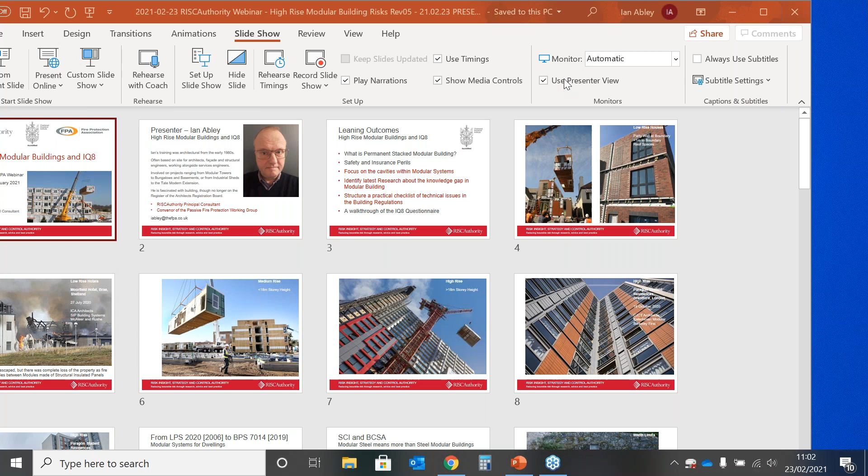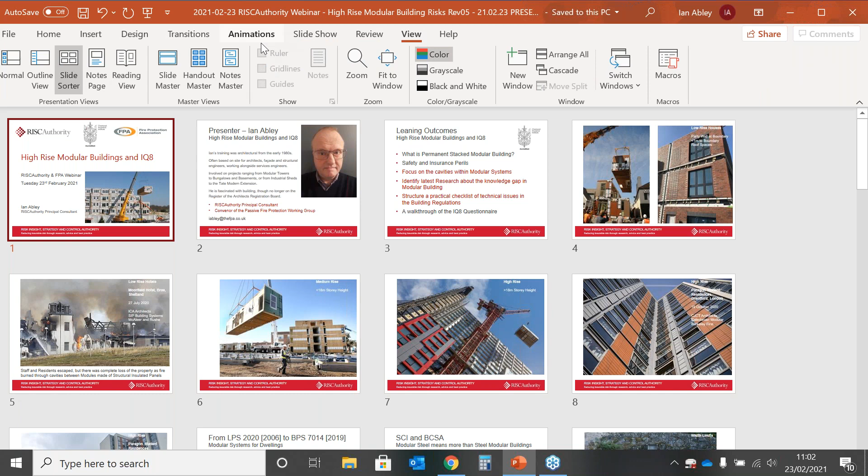Let's hope that's... we can see your desktop. Desktop, so I need to change that to... presenter. No. Right, I'm going to change the... yep. Sorry about this. I should have done it the other way around. I'm very sorry. Is that better now? Yes, that's it. Oh, you might need to change. We can see two slides. Yeah, I'm sorry, it's okay. Yeah, for some reason it's on my second screen. Sorry about this. I can't see how to change the screen. I've got two screens and I can't see where to change the screens.

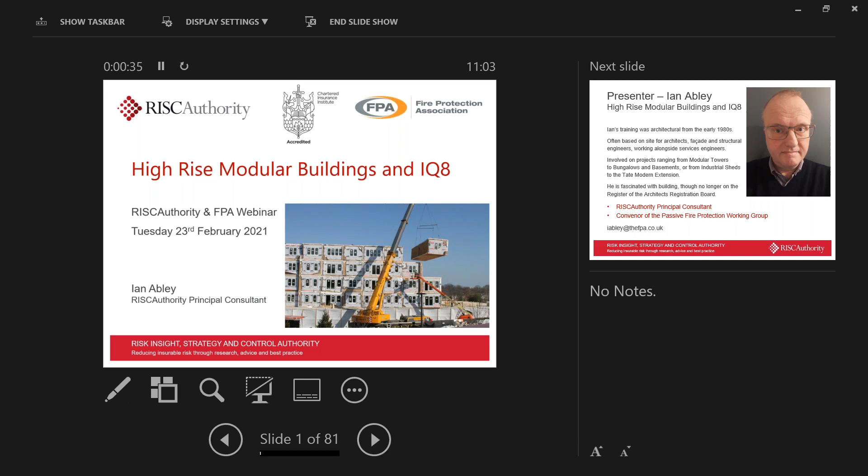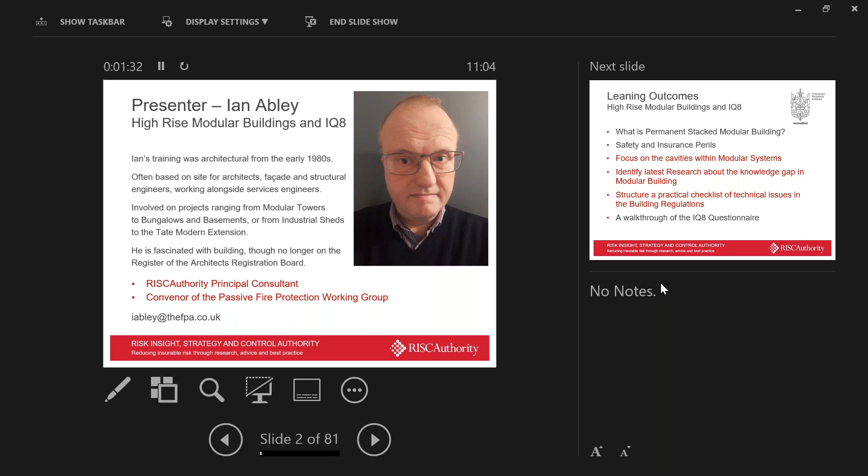No problem. If you go into the task window for GoToWebinar and it has show screen, you have the drop down, you'll be able to select whether it's screen 1 or screen 2. Sharing. No, I'm sorry, it's okay. I can't see which icon this is, Courtney. Where does it say share screen? In the sharing, do you have a sharing drop-down screen? Sharing drop-down menu in the little GoToWebinar drop-down box? Yeah, I'm in the drop-down box, I think. Yeah, there should be a sharing drop-down, and then that's where it has show screen, and then there should be a mini drop-down showing which screen you're actually showing. Oh, beg your pardon. Main monitor, is that the one? That's still showing as the 2. Is that the one? Yeah, that's the one. There you go. Is that the main screen? Yes, it is. Yeah, beg your pardon. I'm terribly sorry everybody, that's my incompetence.

Thank you. Good morning. The presentation today is on high-rise modular buildings and IQ8. The purpose of today is to look at permanent stacked modular buildings, to consider some of the safety and insurance perils. The learning outcomes were listed in the invitation.

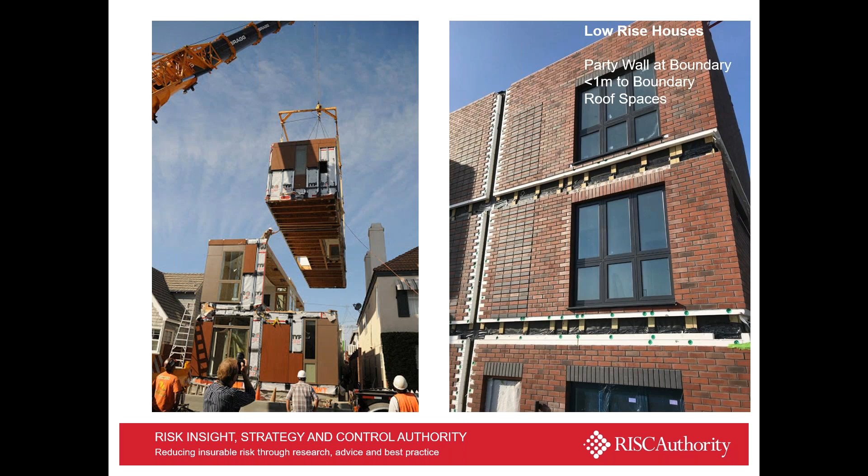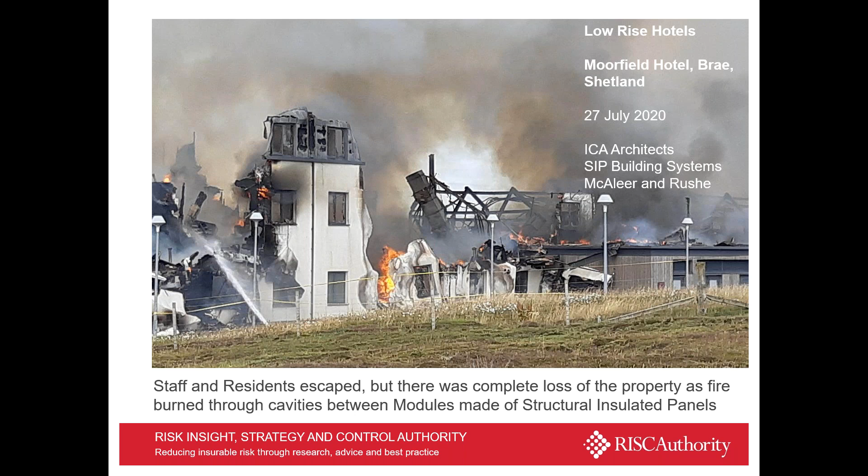I guess the best place to start is to think about what is meant by modular, because we're not talking about low-rise houses in particular, though obviously that's where modular starts at the smaller scale. Some of the lessons learned at the boundary for low-rise housing are pertinent to high-rise, as we'll see. We're keeping in mind that some low-rise modular has suffered complete asset loss recently, including particularly the Moorfield Hotel in Brae in Shetland. Everybody escaped—being low-rise, it was easy—but the hotel completely burnt through.

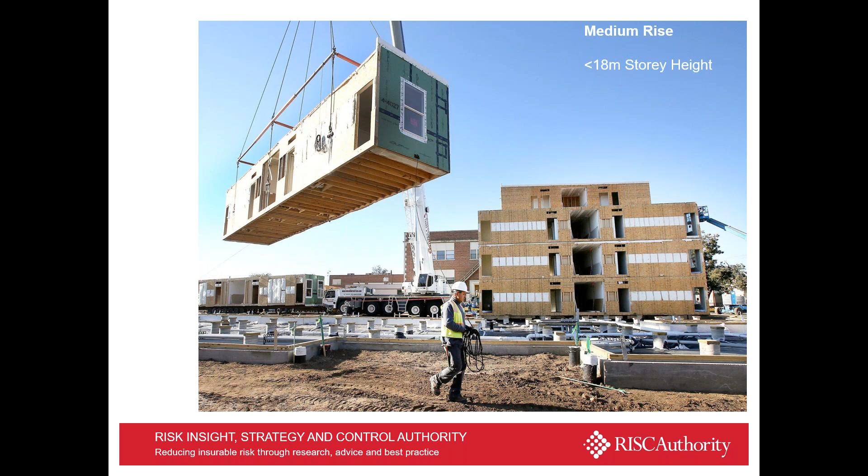We're not talking about medium rise. Let's, for the sake of argument, call that under 18 meter story height. We are going to concentrate on high rise and the increasing push of modular to greater heights, mostly in residential but not necessarily exclusively, although modular is particularly suited for residential because of the room sizes.

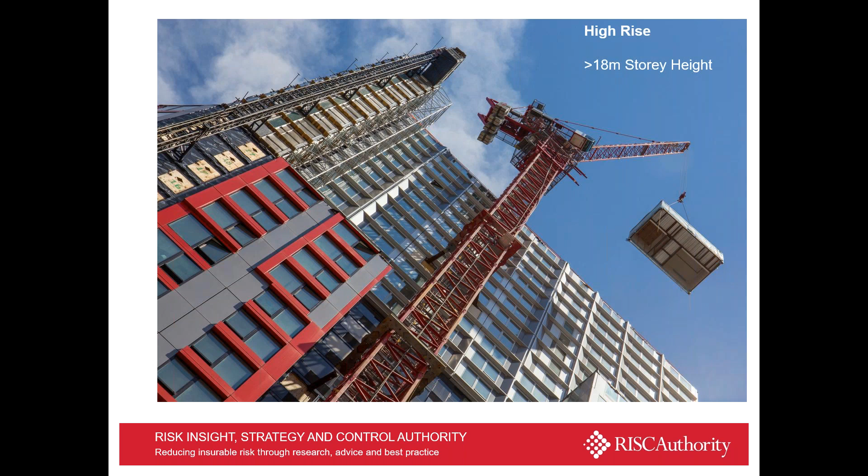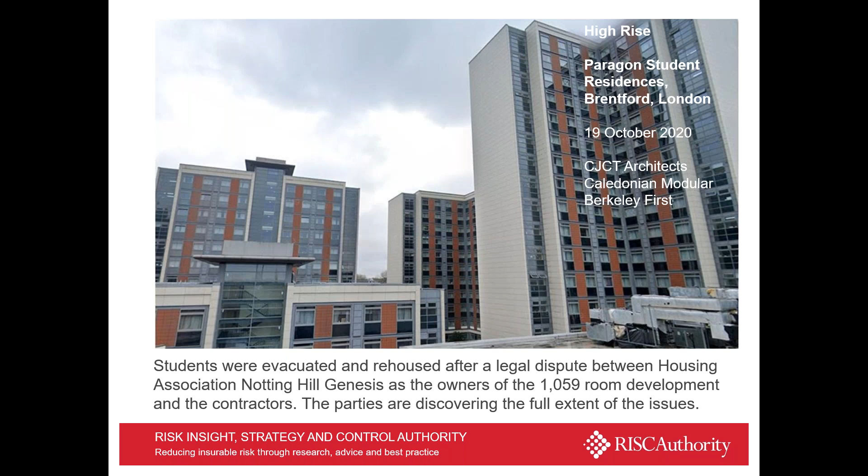We're also bearing in mind the recent incident of the Paragon student residences in Brentford, which had to be evacuated after several years of argument over the fire safety issues in that development. That's an ongoing matter and is not necessarily public knowledge, the precise nature of that dispute. But it's a bit worrying that a development of 1,000 modules isn't habitable, and you kind of wonder how, given the long run of modular thinking, that can be. I think that's the question I've got really.

The BRE has been pivotal from Loss Prevention Standard 2020, which was actually from 2006 - 2020 is just its numerical number - through to more recent attempts post-Grenfell in 2018 and 2019 to develop a BPS 7014 standard for modular systems for dwellings in particular, rather than the broader sweep of innovative systems, elements and components of residential buildings that was LPS 2020.

There's a focus on the stacked-up box, and that focus has been the subject of numerous studies. The early one that comes to mind was the Architect's Guide. When I was an architect - I'm not an architect anymore - the Architect's Guide was interesting reading in 1999, and Peabody pioneered their development.

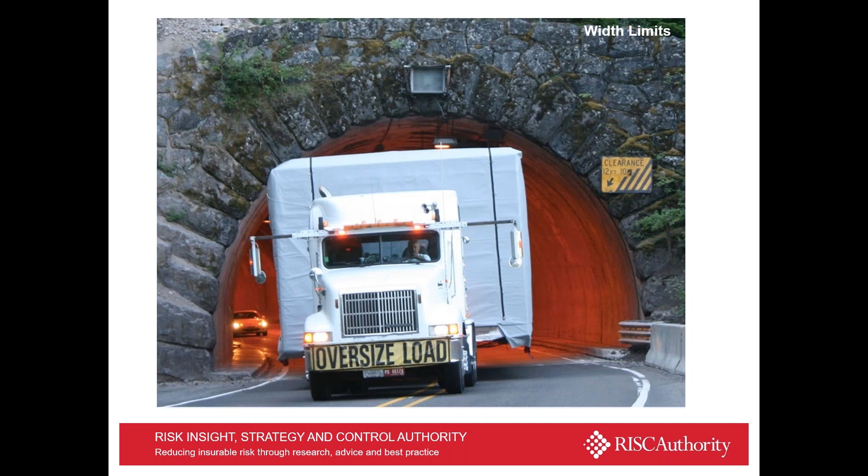Pioneered from the Steel Construction Institute's point of view was what was called light steel framing, though the weight is not light. A lot of the concern at the time was how do you deliver that kind of modular.

Much thinking in the last 20 years has gone into what is probably the best publication in latter years. It was first published in 2014, but then in paperback two years ago - by Mark Lawson from the SCI, Ray Ogden, who used to be funded by the SCI and unfortunately died very young, and Chris Goodier, who is at Loughborough University.

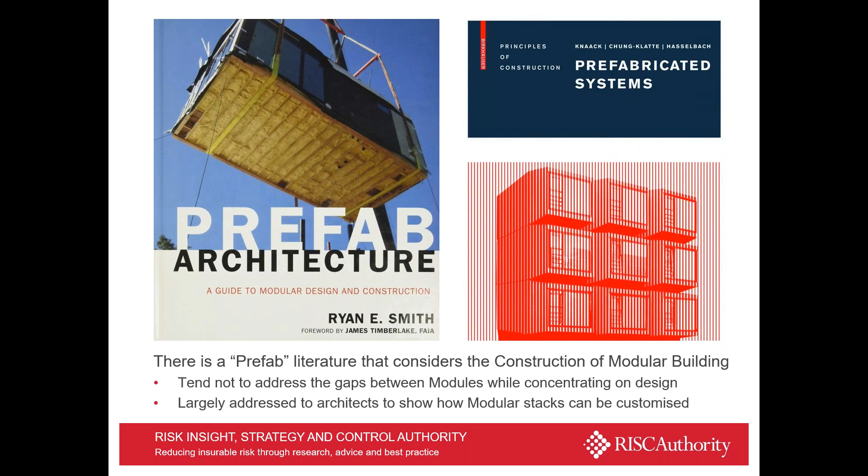This is a good read - worth getting if you want to know about modular. It concentrates on what architects want to know, on the box itself. Most of the guidance is directed at architects, and there's good literature that architects have taken on board themselves and turned into promotions - either collections of architectural schemes or marketing materials for their own practice expertise.

The SCI still publishes very good information freely on its Steel Construction Info website. But it's starting to seem a little naive, I think, given the recent issues with Moorfields and Paragon - it hasn't really got to grips with the practicalities of stacking boxes.

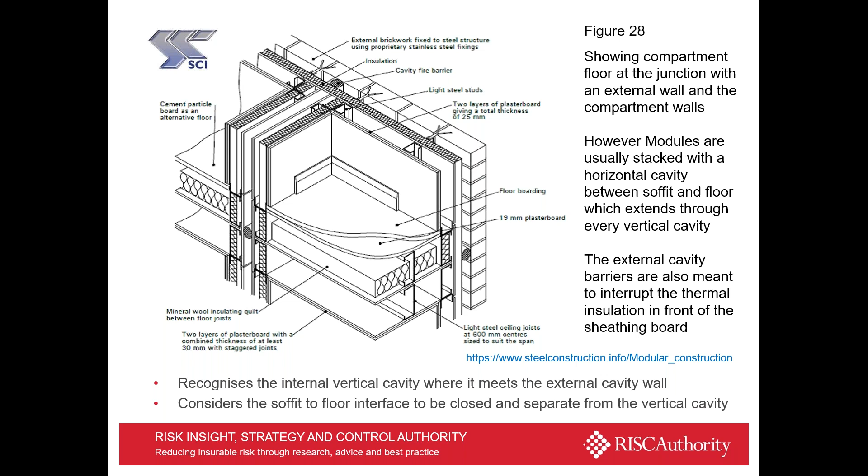In particular, the creation of cavities between the boxes. This diagram doesn't show the horizontal cavity between boxes, between the module units. It does recognize the vertical cavities, and also introduces cavity fire barriers, strangely at the facade - and that detail is just wrong. But at least it's recognizing there are issues between the modules, not just within the modules.

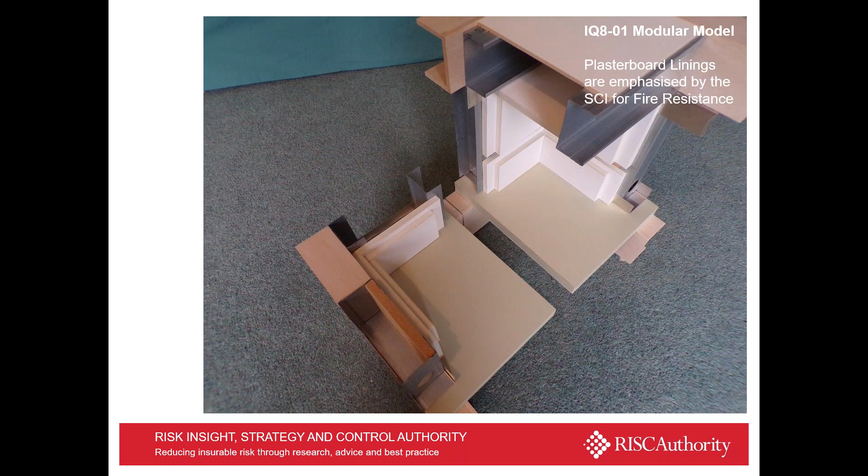So the emphasis within the modules is utterly on plasterboard for a light steel frame approach, because the plasterboard linings are doing a lot of work, as the Steel Construction Institute recognizes. The plasterboard is what people see as well, so people are concerned with the quality of the plasterboarding and the internal quality of fit-out.

Also, as you can see on the right-hand side, the way modules join and have to be masked and finished at their joins - so internal qualities are of great importance. And because the modules are coming together on site, they have to be joined on the outside, and that's got to keep the weather out. So the way that the facade is finished is of critical importance.

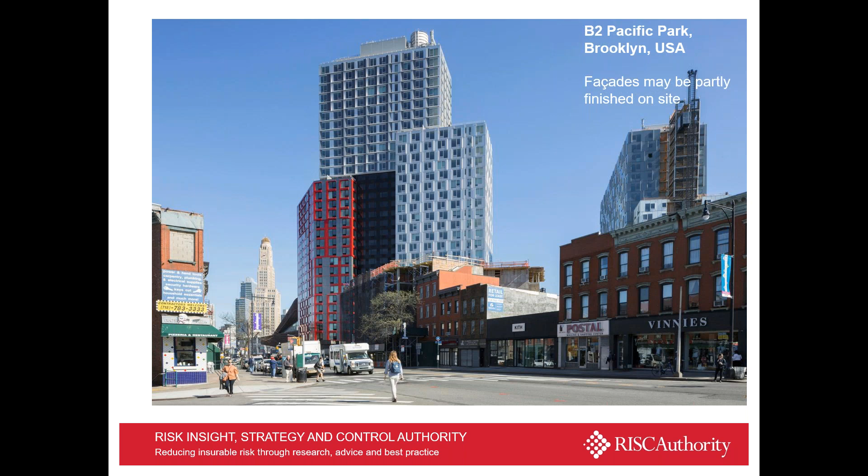This proved to be quite difficult at the Pacific Park projects in Brooklyn with Skanska, which ended up with a very significant contractual dispute.

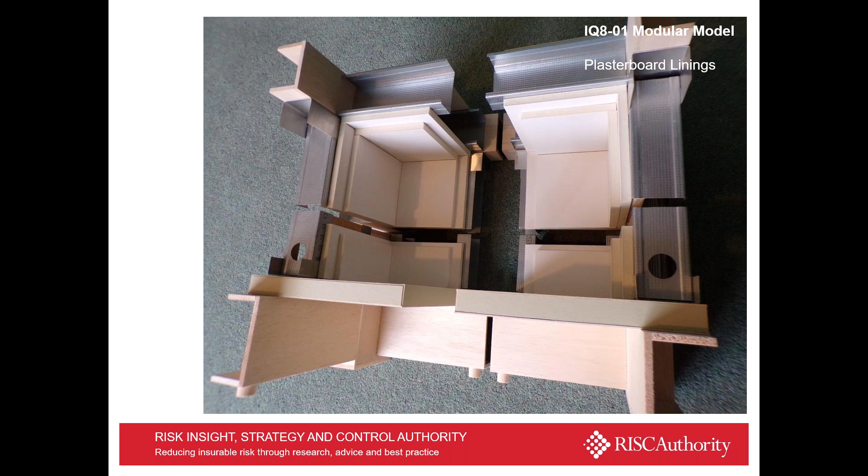So the inside of the box, the inside of the module - the plasterboard linings are doing a lot of work. They're also doing all of the finishing, but the nature of the plasterboard needs to be thought about.

I think one of the most significant pieces of work that recognizes this, again by Mark Lawson and Ray Ogden, this time with Rory Bergin, who's a partner at HTA Architects - within this paper, which is available for a small fee, it's been downloaded, when I've looked at it, about 7,500 times. So it's a significant paper that's often cited in much of the literature.

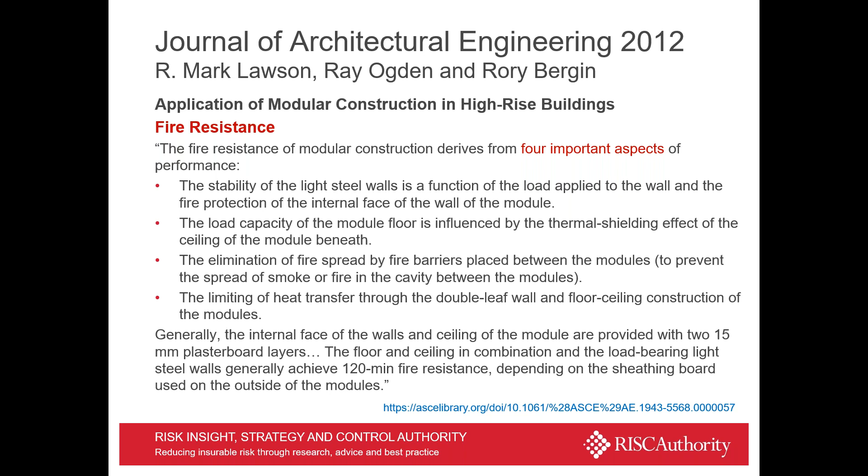There are four bullet points which make you really think about what's going on with a stacked modular building, particularly of a high-rise nature. And if you break those down, we produced a simple model.

It's quite hard to visualize these things in three dimensions sometimes. The box is easy to conceptualize - it seems like you're just stacking up containers - but it's the junctions between the boxes and the nature in which the stacking occurs, which is often proprietary. Every manufacturer's got their own particular take on a system. Some are very similar, but some are extremely novel and almost patentable connections. Certainly the kind of system information that modular manufacturers compete in the market over to make their own service and products better.

These junctions become very important, and the paper, the 2012 paper, the first bullet point recognizes that the stability of the module relates to the infill as much as the hot rolled steel. So the balsa wood part is obviously the hot rolled steel columns.

The infill is often a very light gauge steel section. Here I've used dry lining sections, but sometimes they're larger gauge, 2 or even 3 millimeter cold rolled steel, but they're treated as an infill.

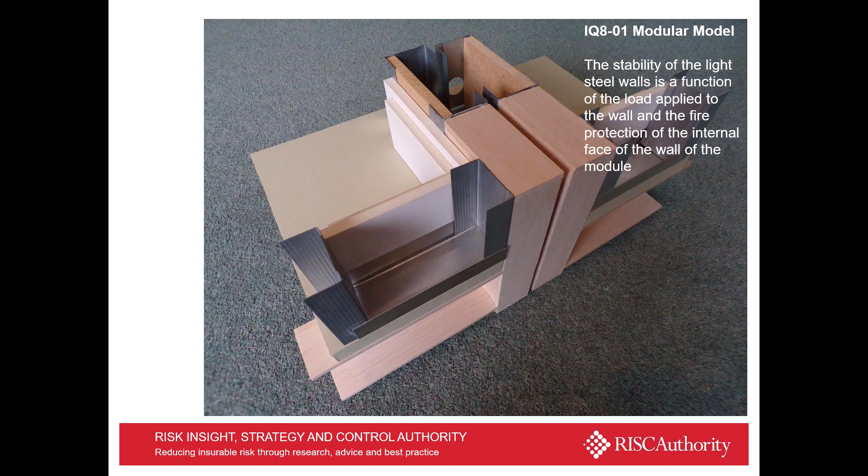The second bullet point is that in fire, the floor, which is shown here as the soffit of the top of the module, the floor above is influenced by the fire resistance of the soffit in the module. Well worth thinking about, because the ceiling inside a module may be a non-fire resisting ceiling below this soffit, so it's the actual soffit at the top of the module that matters.

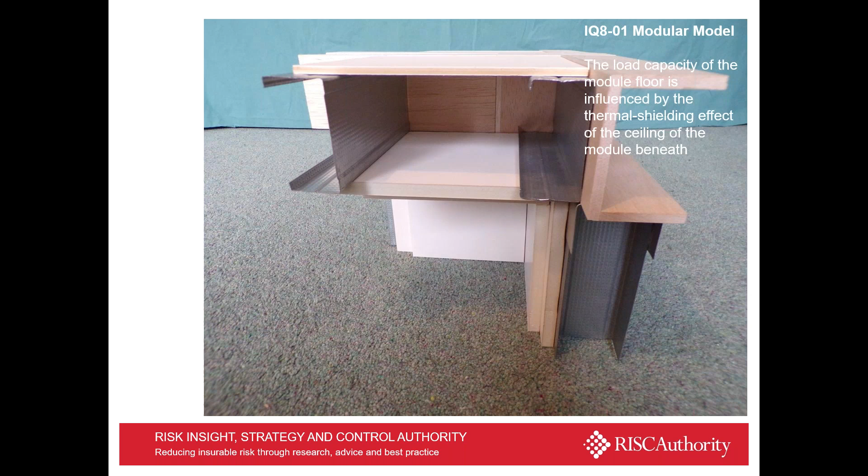As you can see here, where you stack up the next module, the paper is rightly concerned to point out that you're forming cavities. The SCI don't show that on their diagram online, but you create horizontal cavities as well as vertical cavities between modules.

Sometimes the channels at their perimeter flange out, sometimes it's flange in, but the same problem remains: you've got a cavity that continues from one floor to another, and a cavity within the compartment floor running horizontally, joining all of those, which extend to the external facade and back to the core. So as the paper says, they need to be considered for fire.

Then there's a very clear statement as the fourth bullet point of that paper about the way heat, so the insulation of the construction, prevents excessive heat getting to the hot rolled steel structure, which over 550 degrees will start to lose its strength.

Now in primary steel frames, the primary steel is often protected by rock wool or another insulation form, a stone wool fire protection, to prevent heat getting to the steel and melting it, or making it lose its structural strength over 550 degrees.

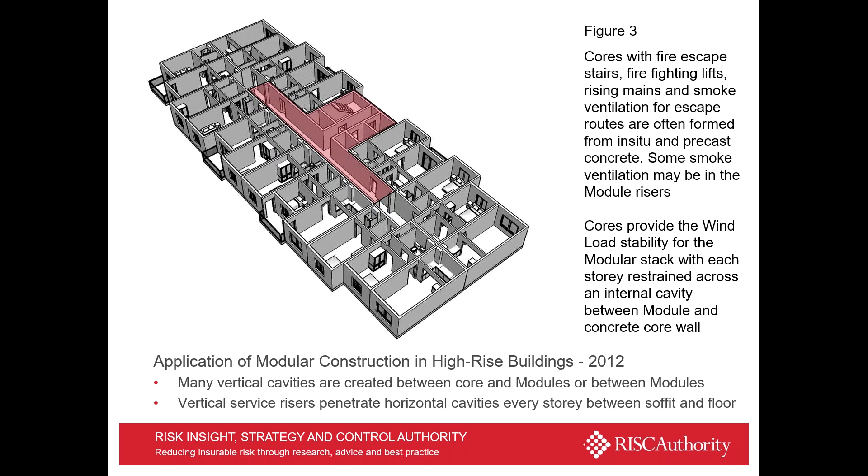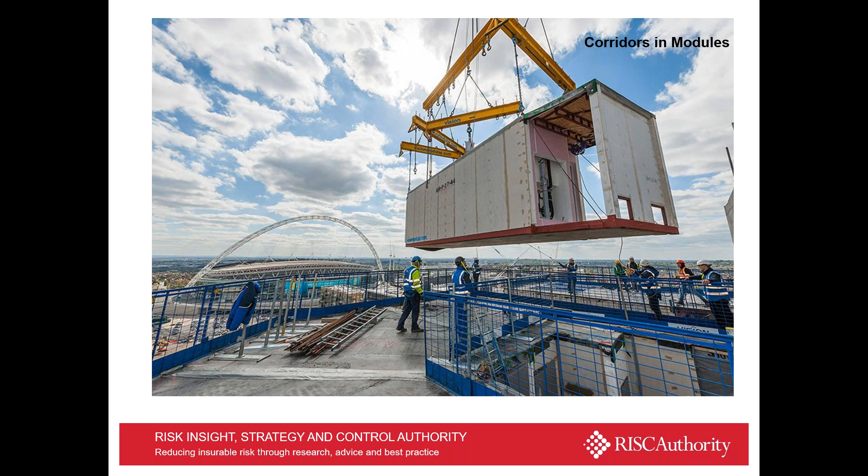Most of the time, you don't have the corridor formed in the core, you have the corridor formed in the module itself, often with service risers running vertically through that space. So within that one module, you've got a room compartment, the segment of a corridor compartment, and a vertical service riser, all interpenetrating, all needing to be thought about as they go through the horizontal and vertical cavities.

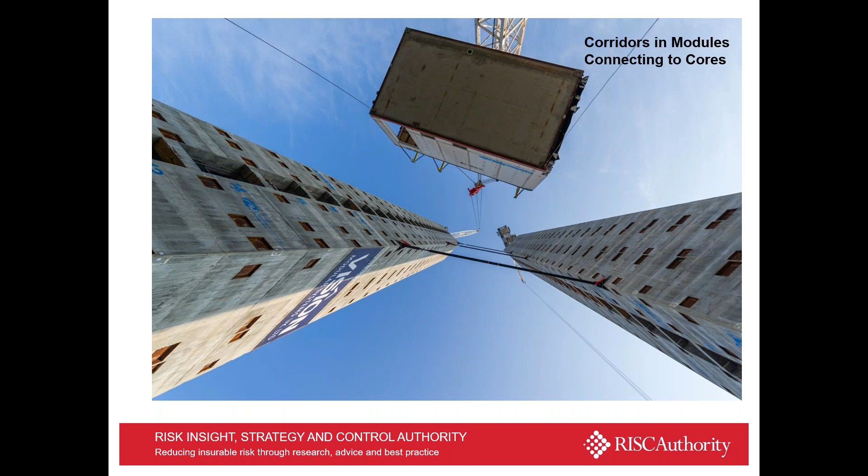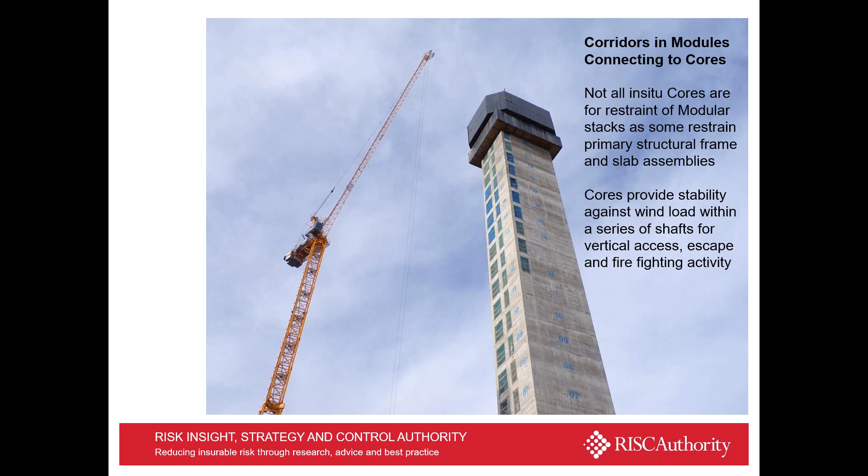And those are assembled around what are often slip-formed cores. In this case, the cores are braced, as you can see, as the modules are erected, because you don't want them moving differentially as the modules are installed. Sometimes you see developments with slip-form cores that are nothing to do with modular at all, and it's just another technique for wind bracing a primary steel frame.

Those structural standards for the core are Eurocodes. In fact, there are a number of standards that apply to modular, and this study, led by Chris Goodier, one of the authors of the design guide for the BSI, was a listing of all the relevant standards that exist for other forms of construction that can be applied to modular.

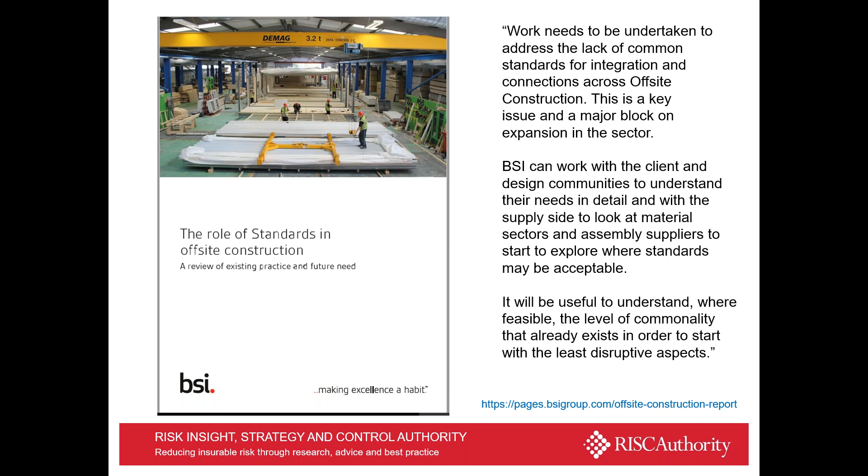It's not just a matter of buying somebody's system. There are standards that stand behind those systems, and that's a very useful guide to those supporting standards that manufacturers would recognize and have to work to.

Similarly, there's work in progress in Canada, looking at the absence of information for high-rise modular construction, trying to pull forward existing standards that can be applied to a sector that's innovating faster than standards are written. Arup have produced the first document in this new study. It's one to watch, I think. The Canadians have long had CSA A277, going back to the 1970s, for prefabricated buildings, but now we're talking about modular towers.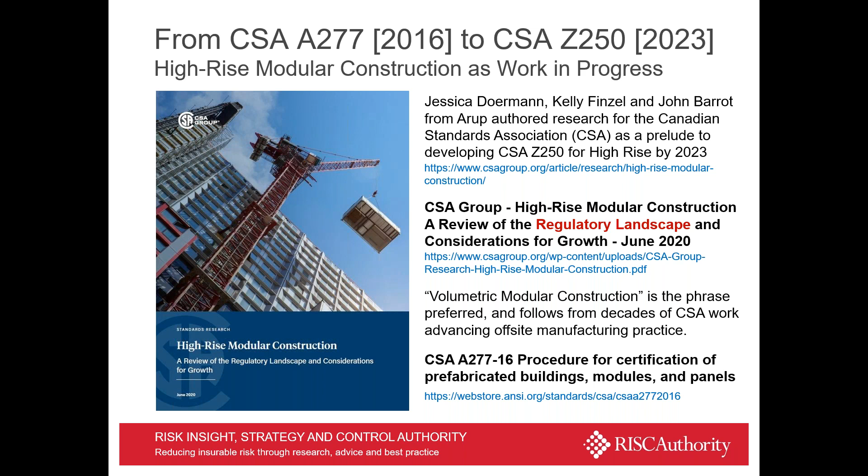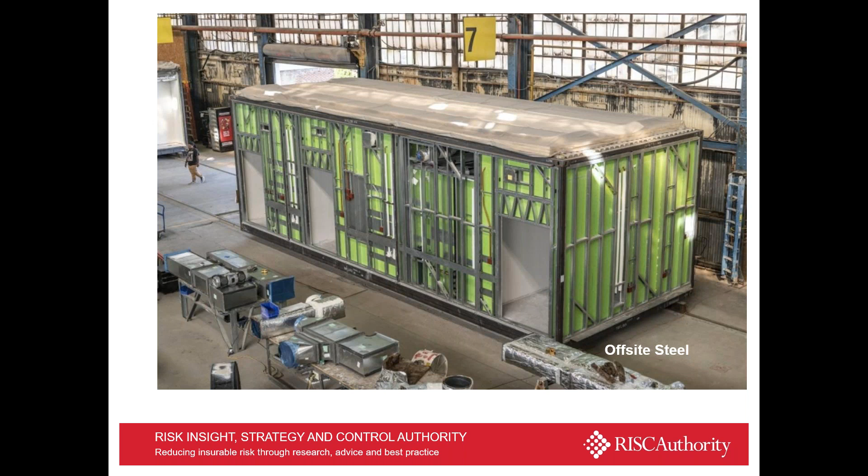They're proposing a standard specifically for the sector, which doesn't exist in Britain, but the Canadian effort is definitely something to follow. They're system agnostic - looking at timber, hot rolled steel frames with light gauge steel infill, and also concrete. Concrete's interesting because it's usually assumed light gauge steel is a lot lighter than concrete, but advances in the concrete sector show weight is not necessarily just the gift of the steel producers. Equally, timber can be extremely heavy as a unit.

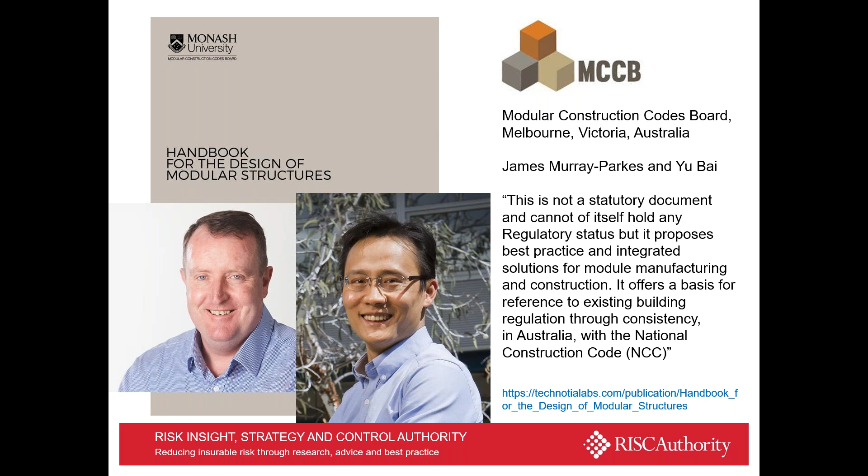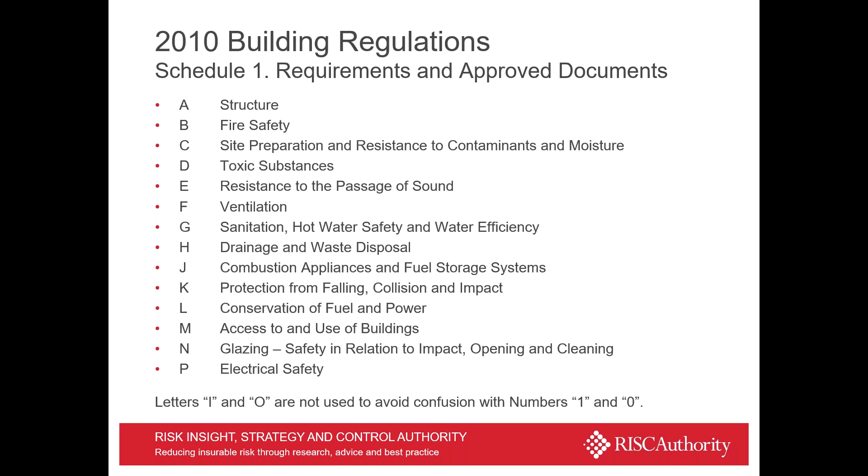And of course, probably the most obvious thing I wanted to say today was, don't invent a new list. In Britain, there is a list. It's the legal requirement - Schedule 1 of the 2010 building regulations - and it makes most sense to follow because it is the legal requirement for any building, including a modular tower. Don't reinvent the wheel - let's explore what modular means in the context of the 2010 building regulations as they amend and as they are being amended.

Now, the approved documents are extended beyond that Schedule 1 list, which is worth bearing in mind. And of course, most famously, most notoriously, Regulation 7 was extended to specifically look at the external cavity wall for fire post-Grenfell, as a response to Grenfell. For high rise, it was explicitly high rise as relevant buildings, Regulation 7.4.

It's easy to get to a point where you forget that Regulation 7.1, the old Regulation 7 on its own, applies to the whole of the building, not just the external facade. The facade is often produced by somebody else, not the modular manufacturer. They have a split responsibility in a contract, which is something we've tried to draw out of the IQ8 questionnaire - who is actually responsible for the difference between the module and the core, and the module and the external facade, because these processes are not just different manufacturers, different contractors, they're also different designers often.

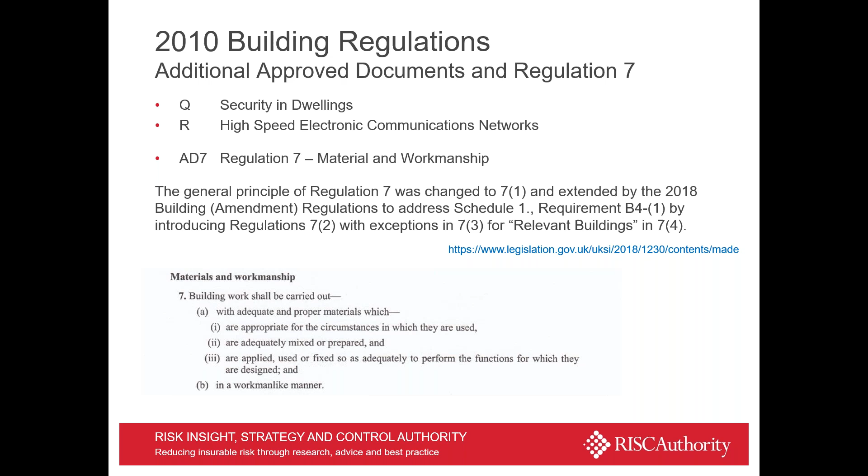It's useful to also remember that the 2010 building regulations are not just looking at life safety. There are sections of the requirements that get transferred into the approved documents - England, Scotland, Wales and Northern Ireland have slightly different technical guidance and technical notes, which are the subject of another report - that's actually the subject of IQ7, which is downloadable now. But the difference in the different sections of the English approved documents and the requirements...

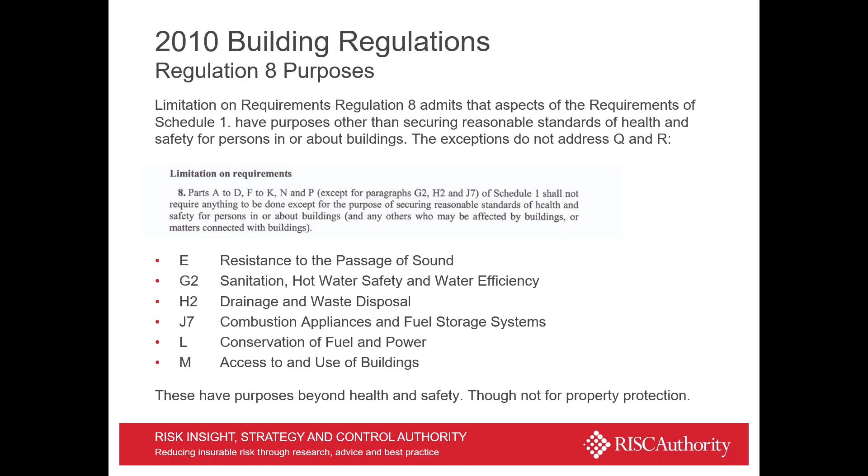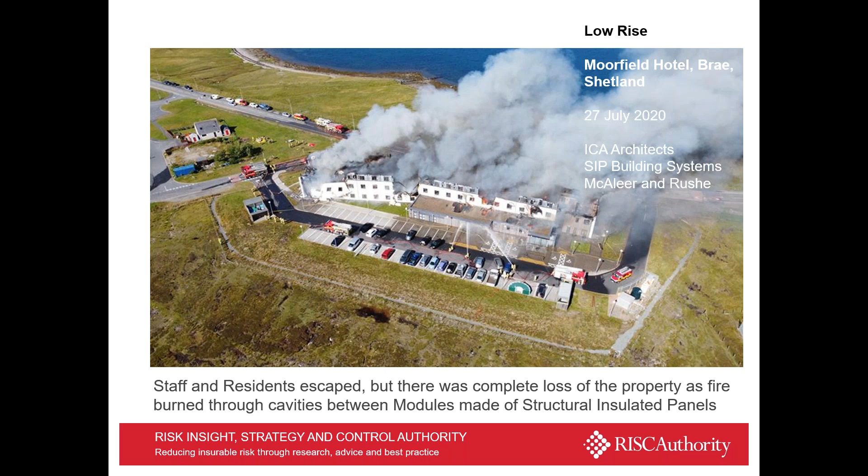...they're not limited to life safety. So loss of the asset isn't part of property protection, isn't part of the approved documents or the requirements, but there is a precedent for other things other than life safety being considered. I think if the Moorfield Hotel in Brae shows us anything, it's that loss of asset is one thing for a 2-story hotel to burn to the ground, quite another for a tower to be a complete write-off. And that fire in Brae was unstoppable - it couldn't be put out.

The Brae construction was a SIPS panel - timber and polyurethane core in the structural insulated panel. But there are many forms of construction capable of being turned into a high-rise structure, and that's a neat - there's a push for timber at high-rise. Light gauge steel has been trying to open the market increasingly and succeeding in several towers in Britain already. But there's no reason why you couldn't build a modular structure to high rise using a concrete core or a braced core of some kind, and stacking the modules around.

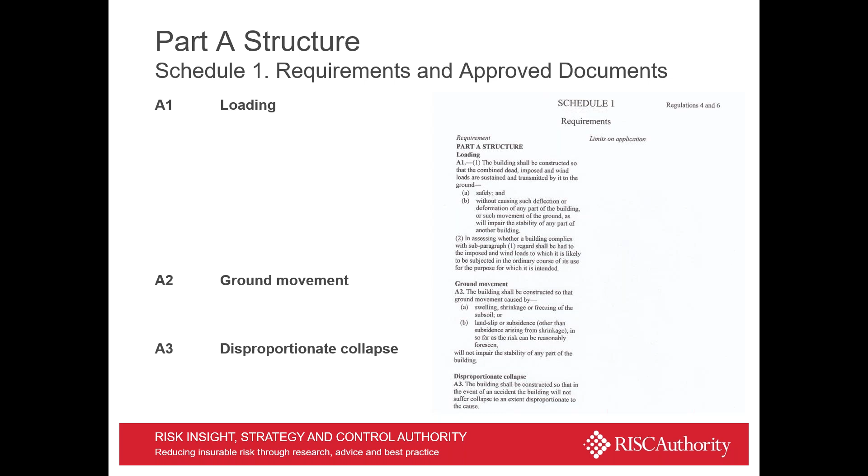In doing so, you really have to interrogate what the requirements of the 2010 building regulations are asking you to do, and that's how we've tried to structure the questionnaire. The IQ8 questionnaire has a front end with higher level questions, and appended to that are a number of more focused questions.

These take the structure of the 2010 requirements, Schedule 1, and drill down into a series of increasingly focused issues to consider. The obvious one for structure is how the modules support the dead load, how the columns increase at the bottom and reduce in sectional thickness at the top, how they're connected, and how they avoid using shims, maintaining levels as you create the cavities going up through the building.

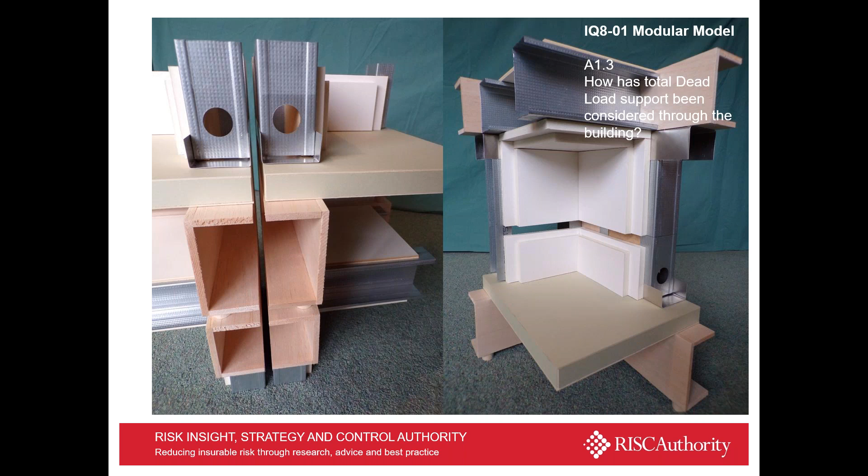So the connections of modules becomes important, and it's one thing to support the building. It's also a factor for the modular manufacturers to be concerned with the way modules are lifted onto the building and transported - their own handling, the way the boxes are framed to take crane handling.

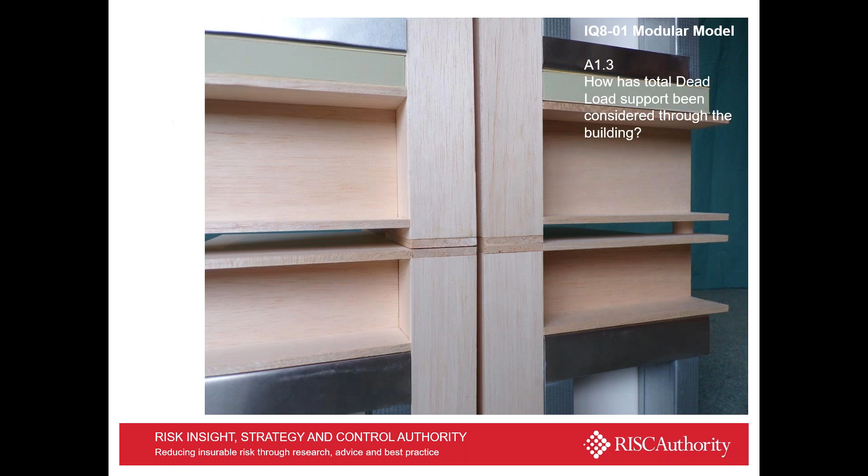Most structural engineers will be able to use existing Eurocodes to work through Section A. But if the structural engineer works through Section A without reference to Section B, requirements for fire safety, they may spend time developing a design that hasn't considered what a fire engineer for a high-rise building needs to consider. Structural engineers are adept at looking at steel in fire, and while disproportionate collapse is an accident rather than a fire condition, the ability to look at fire conditions is part of the design process.

But at some point, a diligent structural engineer will recognize there are fire engineering issues they're unfamiliar with. A diligent architect would recognize that a particular fire engineering approach to a modular tower is needed. Probably one of the most onerous parts of fire safety, Part B requirements, is cavity construction.

Particularly B3 brackets 4 - it's the unseen spread of fire and smoke through concealed spaces. If this presentation does nothing other than point that out over and over again, I make no apologies for that. Cavity construction is the biggest problem in the modular tower.

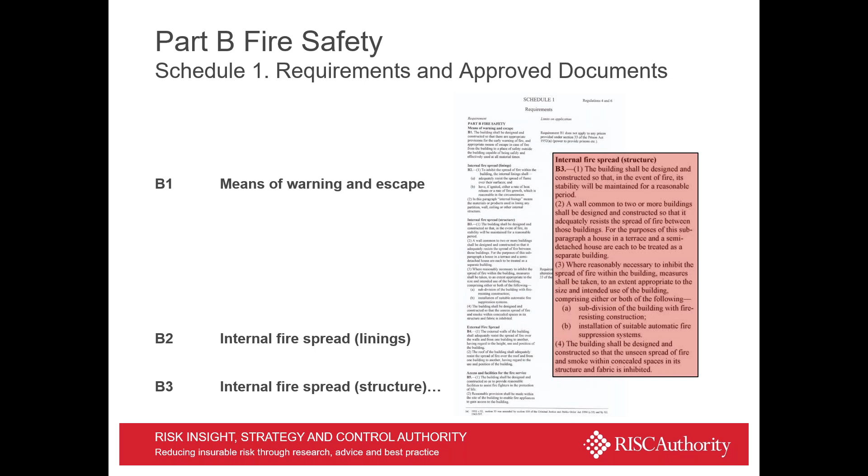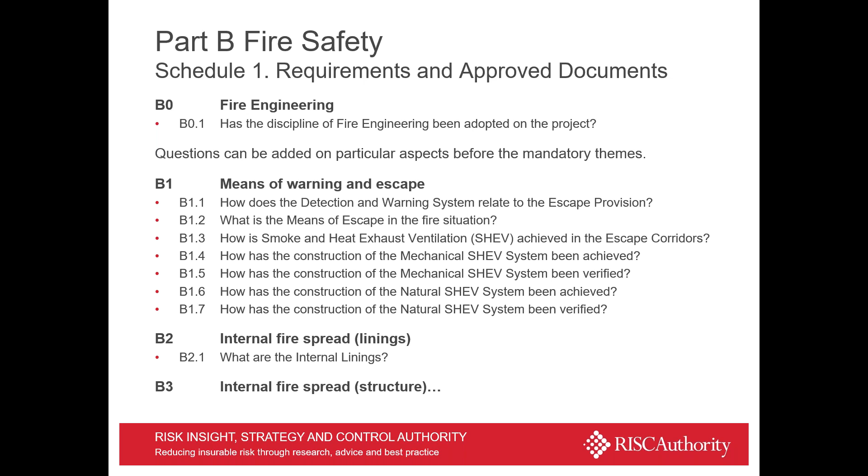So our questionnaire has taken a slightly different approach. When we get to Part B, we've introduced a front end with B0, just to keep the same numerical structure, and then work through the familiar parts of requirements B, adding handover information at the end - so the Regulation 38 compliance issues.

A front end anticipation of more than a fire strategy, but the need for fire engineering, and with a view to the back end, the handover of the completed building to the responsible person under the Regulatory Reform Fire Safety Order, and the statutory requirement for Building Regulation 38 information - not just an O&M manual, but specific fire safety information, a responsibility that's only going to become more acute.

If you're dealing with a modular manufacturer, you'd expect the Building Regulation 38 information to be anticipated as a system. It could be one of the purchasing questions of a project - what information will we receive based on your system, even before you've awarded a tender? One of the advantages of system building is that you get advanced knowledge of what's coming. If they don't know, then they haven't got a system.

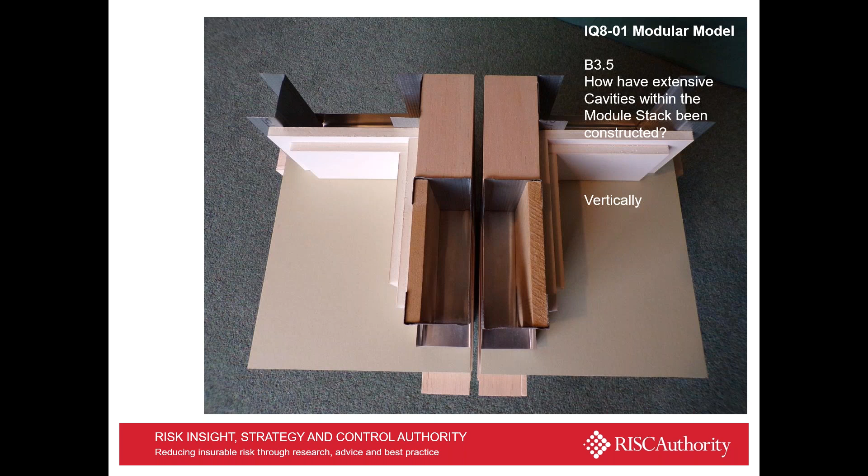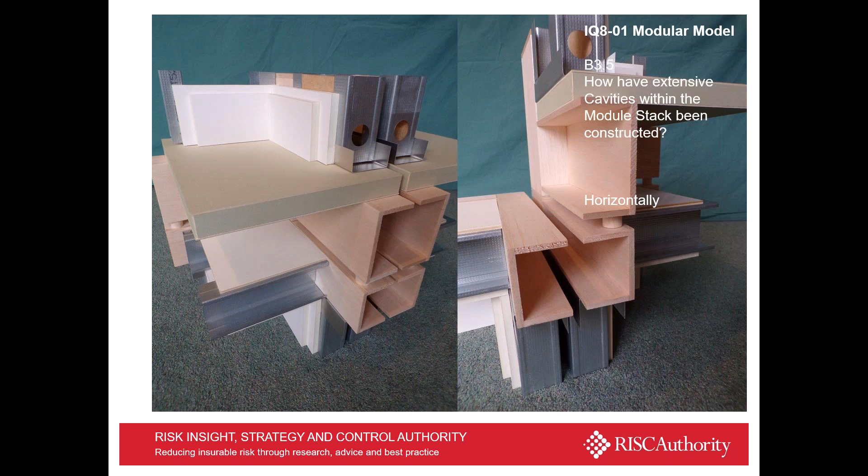So we've concentrated very much on how extensive cavities are created vertically and horizontally, thinking about the gaps between modules, not just the room spaces, but the cavities. And that's not an innovation - that's understood by the BRE, and has been formulated as LPS 1501, which is the full scale testing that's recommended, but it's not well known.

It's referenced in BPS 7014. Remembering that BPS 7014 is only a draft, it's not actually a functioning piece of guidance, but it shows the direction of thought around the BRE and the people they're consulting with.

But I found LPS 1501 slightly strange in that it looked at a three-way joint, not the four-way joint, because it's the presence of the fourth module making a cruciform connection, and you could argue there's a need for an 8-way connection in some modules. But at least the 4-way joint would have shown the effect of heat, as the 2012 paper pointed out, on the cold rolled steel, because one of the failure modes in LPS 1501 is the extent of deformation of the floor structure in the compartment above.

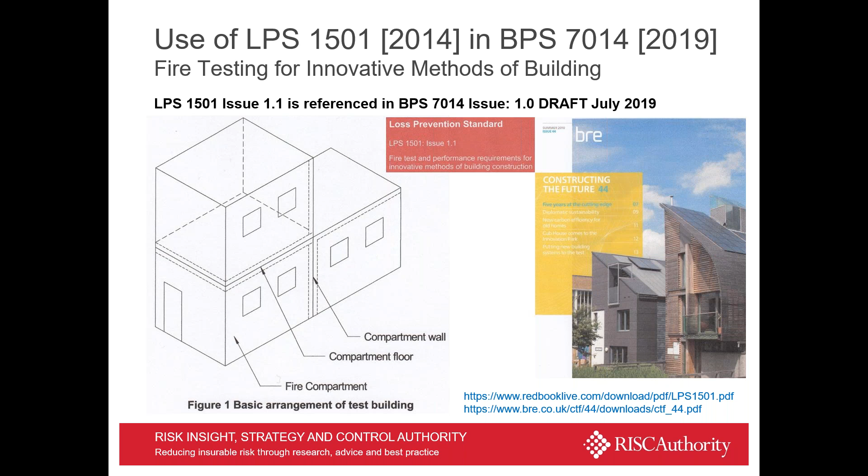Now, I've never seen one of these done. That might be my ignorance. I don't know how many. I couldn't find out how many LPS 1501 tests the BRE have carried out. It's not very well publicized. You really have to look for it. I suspect they haven't undertaken many of those tests.

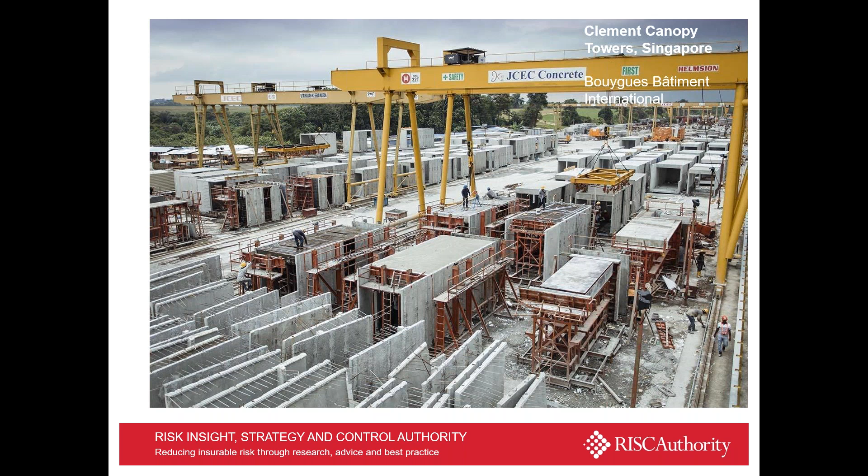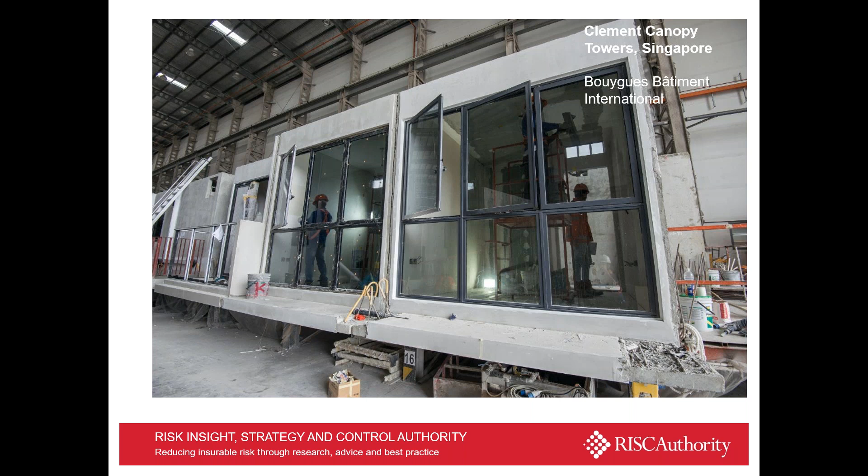Those tests can be carried out by any form of construction. Now, obviously, if you're Bouygues building in Singapore, they've committed to a concrete system, both for structural and for fire reasons, but also for, as we'll see in a moment, other factors, and that is currently the tallest residential tower. It's overtaken the residential tower in Croydon.

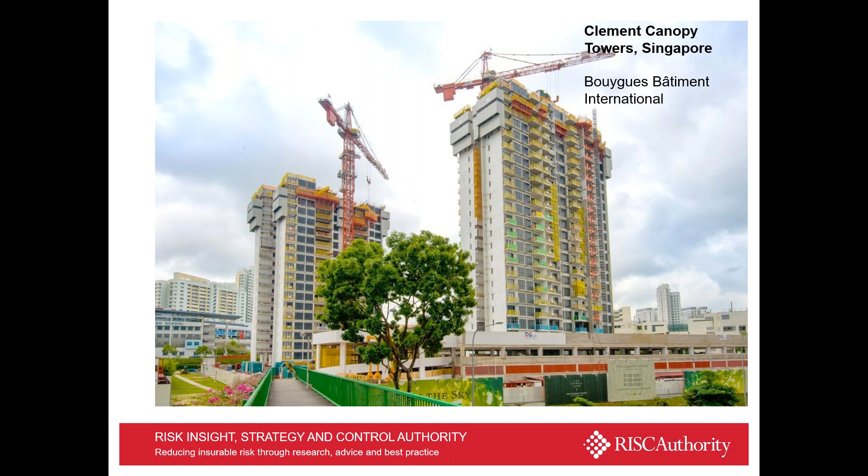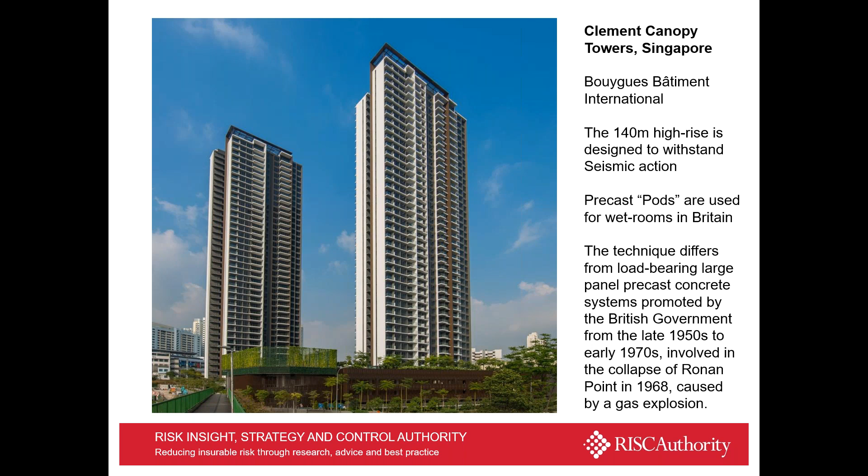This is soon to be increased. I'm sure there'll be another tower very soon along the way to claim the title of world's tallest modular tower. But this is the current example. It's also built in a seismic area, so the use of concrete as towers get taller might be a commercial factor that comes into play, where the SCI guidance to date has tended to concentrate on buildings of lesser height, but nonetheless high rise.

But whichever way you do it, timber, concrete, or steel, the important thing with the compartmentation is to maintain that performance at the numerous joints and penetrations that will occur on the job. So there's been some excellent work by the ASFP, BESA, BSRIA, FIS, and the Gypsum Products Development Association.

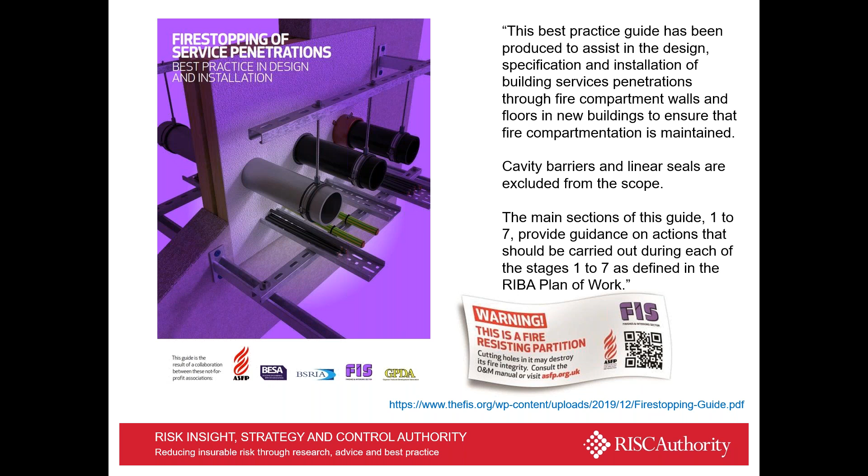Looking at not only the quality of wall construction, particularly for dry lining, but also the importance of penetration seals. But this guidance excludes some of the cavity barriers and linear seals that are going to be needed in modular, particularly within the cavity, the horizontal and vertical joints, 4-way and 8-way joints that have to be considered.

And one of the things that struck me reading what I call the FIS guide, it's mostly been promoted by the fit out sector, the dry lining trade association, FIS, as a collaborative approach with the ASFP. But you look at a module and you want, where's the deflection head? You very rarely see a steel module, at least, with a deflection head. Now on a concrete module, the whole of the wall is acting as part of the wall construction.

For steel modules, there's a decision to be made: is the hot rolled frame doing all of the work structurally, and the plasterboard providing the compartmentation supported by a non-load bearing infill construction, in which case it needs a deflection head, and that has to be fire rated and fire tested as it would be on a conventional project with a primary steel frame or a concrete soffit.

Or is the infill wall, which is often just one-sided plasterboard and very light gauge steel dry lining sections, actually performing a structural function? Because if it's completely wedged into the hot rolled steel frame, the load is being transferred down onto the light gauge steel sections. Now, that's bad enough in a non-fire situation where you've got load deflections from floor loads, impact sound issues transferring through the sections.

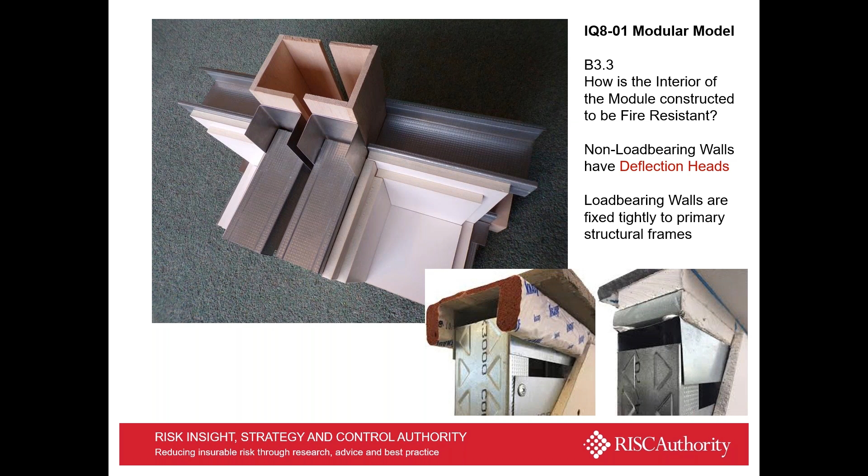If they're using the sections to be part of the structure, they need to be more than a dry lining section. So the IQ8 questionnaire is trying to get into the detail of exactly what the wall construction is made of as a pair, and they're always single-sided constructions because they're made from the inside out. They can have sheathing boards on the outside. Sometimes those sheathing boards are cheaper materials just to hold the insulation in place. The insulation is not shown on this model.

But quite often the plasterboard's augmented with timber products, often OSB, inside the framed infill to take the load of cupboards. So the fit-out loads are carried as is conventionally done by dry lining companies using OSB or a timber board product. But whether that OSB is fire retarded or not, it is a fuel load; a fire retarded OSB is just a fuel load that's been delayed in its action.

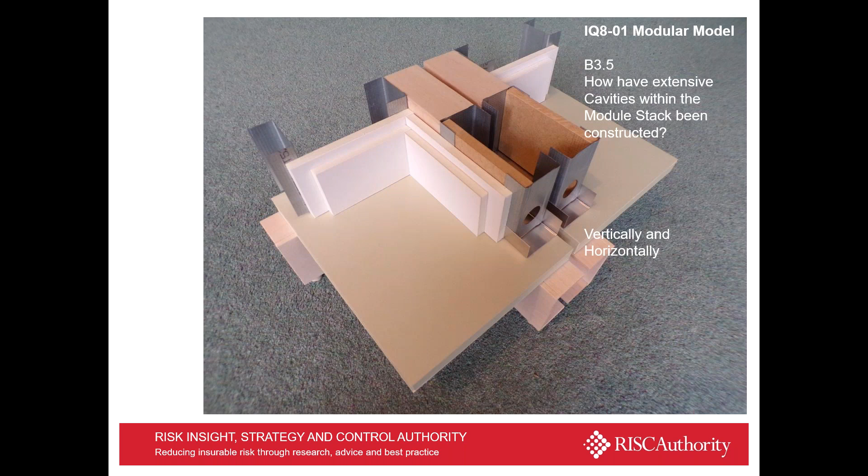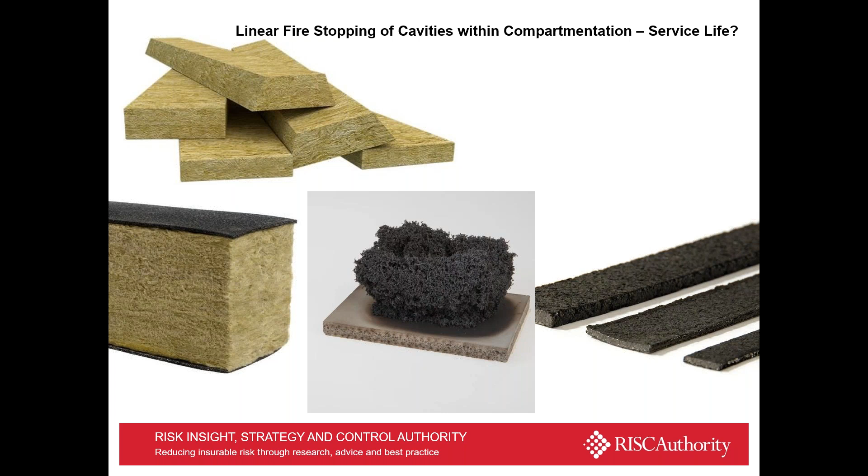There's a combustible materials load being built up inside the floor, inside the party walls, which makes one of the obvious things to take out the combustible load inside the cavities. But if you've got extensive cavities, you've got to have them fire stopped. Not cavity barriers, because cavity barriers implies a 30-minute integrity performance, but fire stopping for the duration of the life of the structure, which could be 120 minutes, probably will be 120 minutes for a high rise.

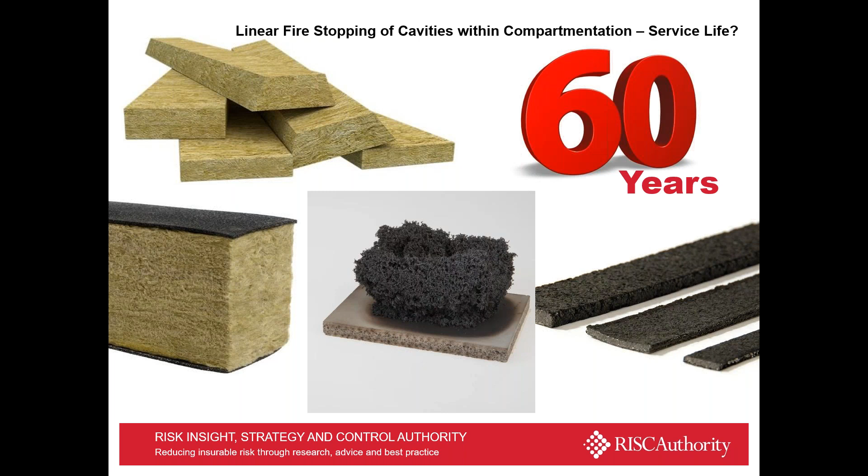And the question there is, what material can you use to achieve that fire resistance performance between the modules that you can never get back to for the life of the building? What's going to last for 60 years, which immediately rules out intumescent materials, because maybe the market will develop intumescent materials that are proven by experience or credibly age tested to show a 60-year service life. At the minute, they don't exist on the market. There's plenty of stone wool products that would serve as fire stopping, but intumescents are not there.

And so fire stopping at the end of Part B, within the internal modules and thinking about how that fire performance is going to be achieved in the facade, does relate directly to the way the facade engineer has got to think about protecting the outside of the building from rain. It also affects the way that the pods are protected against accidental water damage, leaks in bathrooms, spillages, plumbing failures, any number of ordinary, easily foreseeable, insurable events that might affect products down the cavity that are very difficult to get back to and replace and repair if water damage occurs.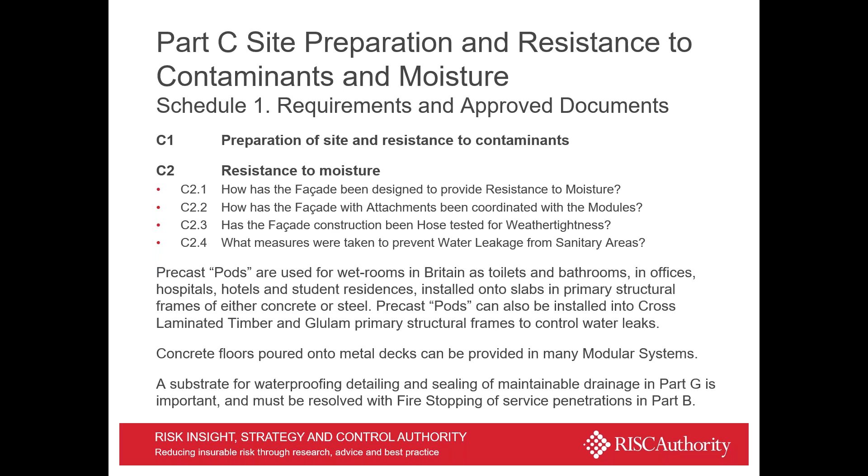Often the floor slabs, the floor panels in a module, are running straight under the plasterboard infill panels. There's no upstand. There's nothing to stop water pouring down the cavity from a leak. So it's not necessarily just a limitation on the damage to plasterboard in one particular module. It could start affecting other areas lower down. It could start affecting structures that are susceptible to water damage too.

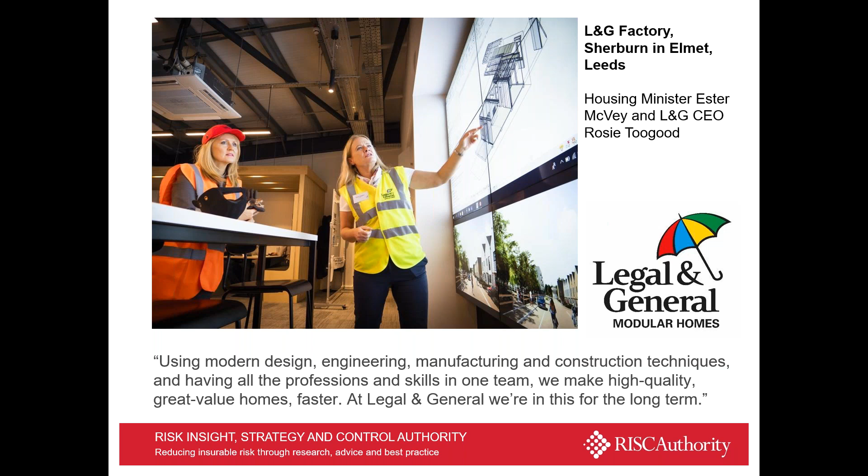So for example, the L&G factory has been pushing a timber approach. How water is managed in those timber modules is of critical importance, I think. Concrete boxes are one thing, steel frame another, and timber brings its own issues. And of course, you can get hybrid versions. You can get timber floors in steel modules. A lot of R&D has been spent by L&G in developing their system. There's some excellent waterproofing systems around. They need to be asked for as part of the questioning of what kind of a system you're actually buying.

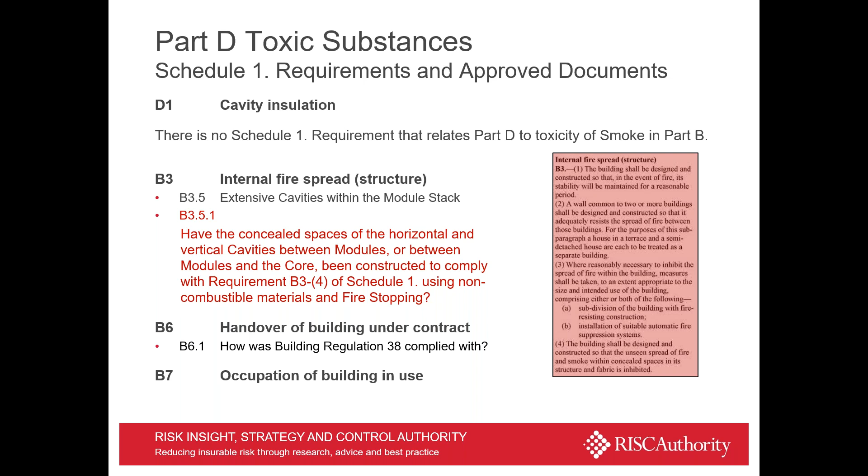I'll come back to Part C condensation risk in a while, because often condensation is discussed more in terms of thermal. Part D isn't particularly relevant, although it raises a question of the way that the building regulations are not concerned with the toxicity of smoke. They're barely concerned, except until you get to the approved documents, with the quantity of smoke, but the actual quality of smoke, the toxicity of smoke and its passage through the cavity is not discussed. Something to think about, definitely, though, when Part B is being thought about for compliance with the extensive cavity rules.

Part E becomes much more important, I think, and a structural engineer could really give an acoustic engineer a lot of grief in the way that the modules are connected together. They might work structurally, but in terms of acoustic transmission, they may be very difficult to treat. I won't dwell on this, but it's also not an area I'm particularly familiar with. Acoustic engineering is a bit of a black box specialism, though I don't think it needs be. I think that's just the way the profession has developed something of a mystique. But perhaps acoustic engineering in modules is something that hasn't been looked at enough.

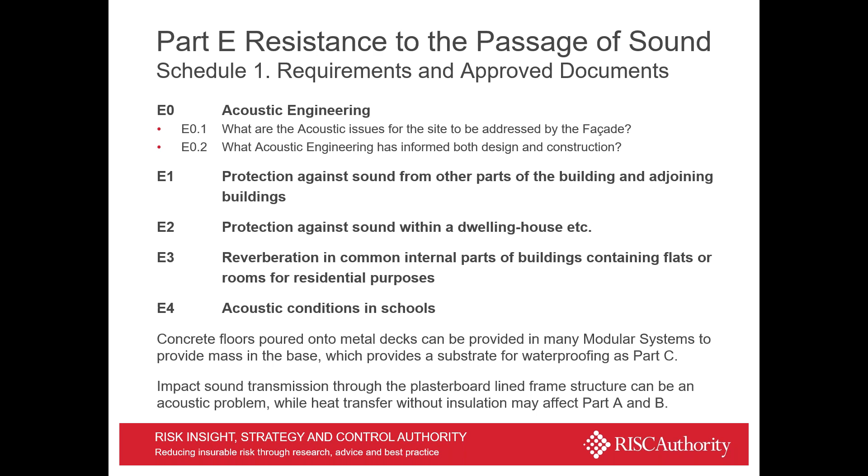Feedback from buildings in occupation would be very useful to see which kinds of systems perform better acoustically. But probably, jumping ahead through the requirements, the main issue, I suppose, is not so much the acoustic insulation, that is often glass wool internally to the modules, which I haven't shown on my model, but the external thermal insulation of the envelope, which does relate to Part L.

So in the questionnaire, we've looked at the way the envelope is considered, and particularly the way the envelope has to be considered as the modules move. So the relationship of Part E and Part L back to Part A in structures, I think, is very important. So pulling together that information early on in a project is useful for the design team. That may have already happened by the time the insurers are asking questions about a development that's already partway through its RIBA plan of work stages.

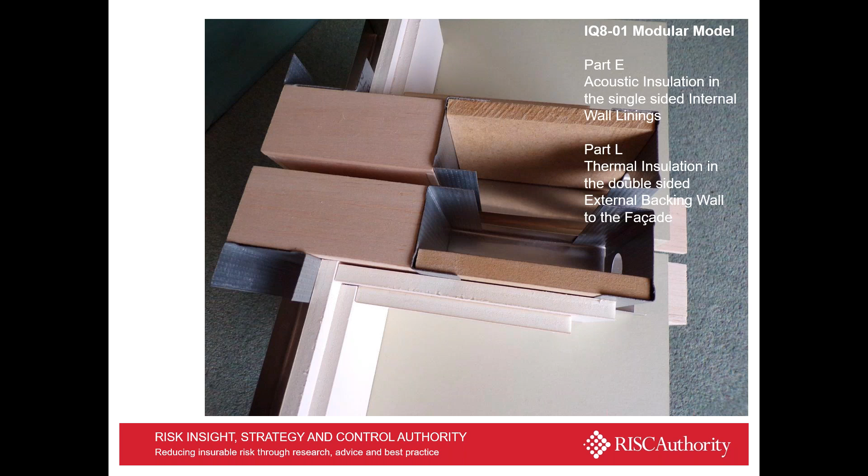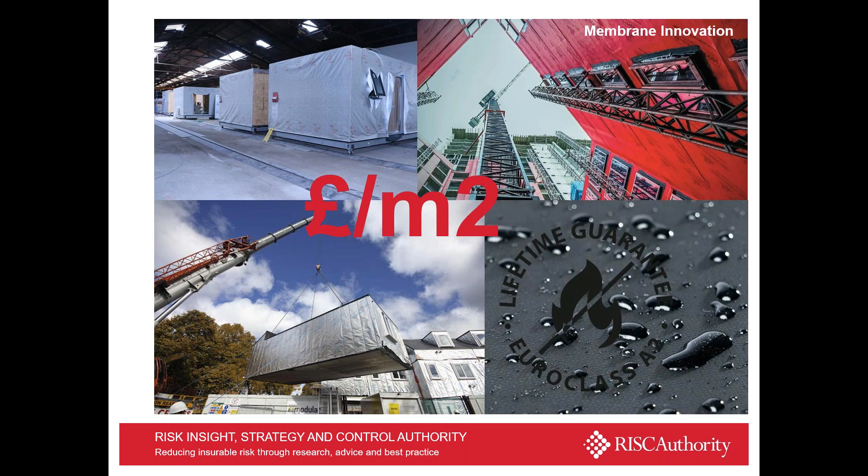And keeping the rain out is also a temporary issue. So there's been a lot of innovation, particularly in relation to Regulation 7 for the external wall, but there are even A2 membranes now that are available for temporary weather protection. Because remember that the temporary weather protection, even though it's going to cost a bit more, is actually on 5 sides of the unit, because it's getting trapped. It's wrapping in the box, the temporary waterproofing is kept inside the cavity, so it becomes something of a combustible fuel load when you double them up, module against module, inside the cavity.

That is also affecting the way the cavity barriers have to be installed, because the temporary weatherproofing membrane can't run behind the fire protection inside the cavity. Otherwise, it's allowed a breach of the tested system for cavity fire stopping, the linear seals inside the cavities that have to wrap around all the risers, all the corridors, and between the modules, horizontally and vertically. A big piece of work. I mean, not a high value part of the contract. Fire stopping is often a smaller package on most jobs, but significant in its performance.

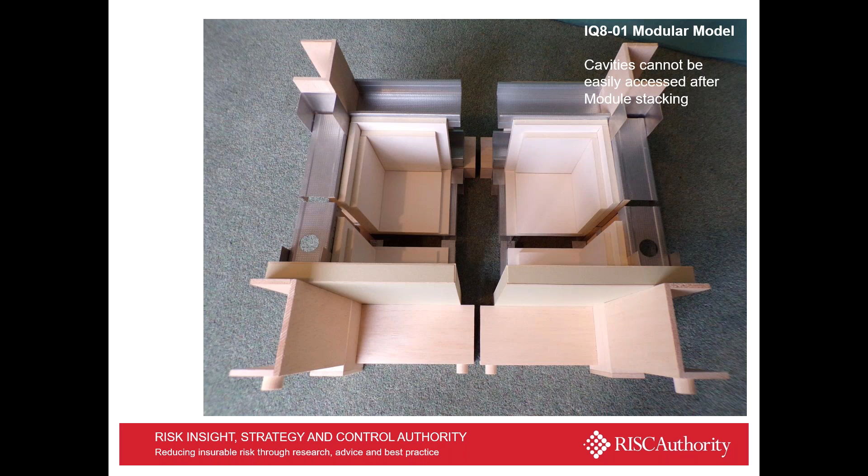And testing these things outside of full-scale tests like LPS 1501 is a bit tricky, because a lot of the product tests assume an immovable object. They're tested between two lumps of concrete. So linear joint seals tested as products aren't necessarily working as the system. So I think it's going to be increasingly important to watch what happens to LPS 1501 as and when and if the BRE manages to progress that guidance beyond the draft. Maybe the Canadians will get there first. Maybe the Australians have already done it. Looking at the two documents, I don't think so. I think this is a frontier of knowledge that needs to be worked at.

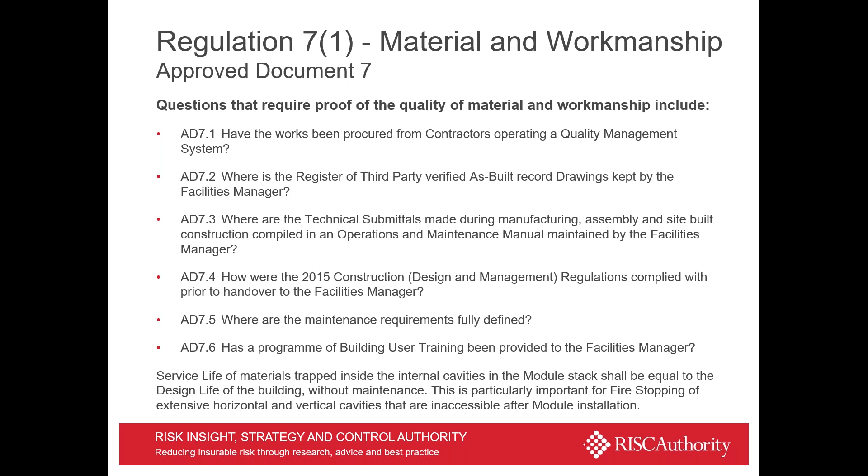And it's a frontier of knowledge that has to be handed over as answers at the end of a project, and is part of the contract. I mean, Regulation 7, service life, invariably part of a specification, the declaration of service lives and the performance of the various components, broken down into all the parts that have to be replaced and need to be accessible. Whether that's for water, better plumbing, so accessible risers, making sure that the seals can be replaced as they deteriorate, that leaks on particular joints can be addressed in service risers where they have to be connected module to module. They can be checked right the way through to the service life of the fire stopping, or even the service life of the waterproofing systems that go underneath tiling.

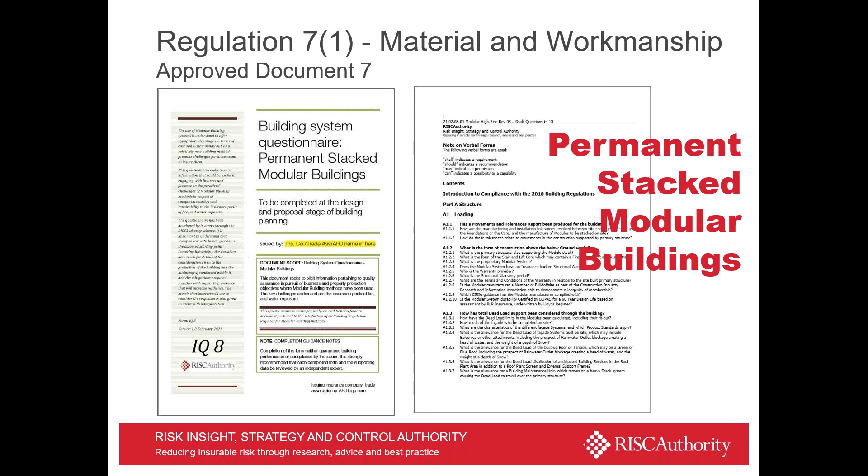I mean, all those things need to be accounted for, because we're dealing with a permanent, not a temporary. We're dealing with a permanent stacked modular building, and if that contract is for 60 years, we need to know which parts of that building are going to last 60 years with no maintenance, last 60 years with some maintenance, or increasingly shorter periods of time with increasingly more maintenance, until you get down to the tertiary components in a system, which should all be known by the manufacturer. So you've got a full idea of how the permanence of that overall building can be sustained over a 60-year service life.

Now, of course, that's exactly what the Build Off-Site Property Assurance Scheme was set up to achieve. It's an assessment scheme run by Build Off-Site, BOPAS, where a system is assessed to existing British standards for service life, and the full performance of that system should be available before you buy it. It's online. The reports are available and updated by BOPAS.

It's underwritten by BLP. BLP are the insurance company that undertake the assessment, and it's underwritten by Lloyd's Register.

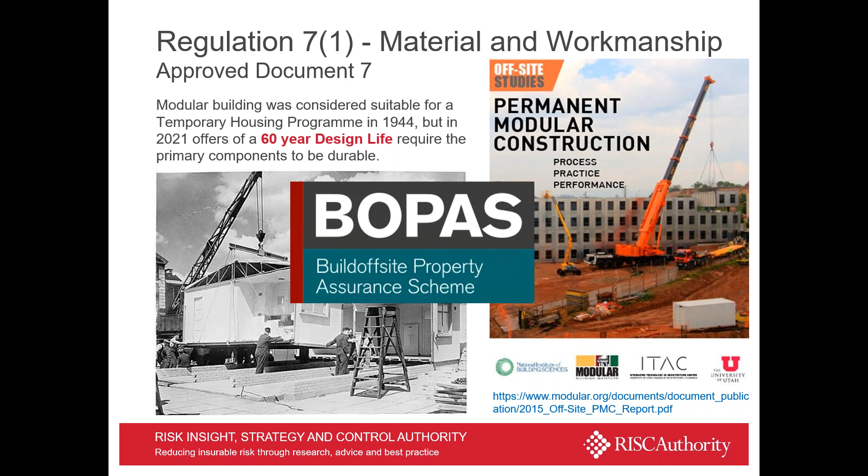A lot of work's been done on service life. That thinking needs to extend back through a checklist of all of the requirements in the building regulations, and to look at the gaps between modules, not just the module itself. It's one thing to make a plasterboard box, it's quite another to make a stack system that satisfies the A to Z list, the A to P list of Schedule 1 of the requirements, and notably Part B and Part C.

So yeah, the summary of it's a bit of a wordy slide, this one, but they don't invent a new checklist. Stick to the requirement schedule that is the law in the 2010 building regulations, and develop that beyond the 2010 iteration of that requirement schedule into all the issues, including issues that are more than life safety, that the evolving building regulations requires. That's a very basic checklist.

But once you've done that, you see that it's quite an in-depth interrogation of the system, and know your system, identify the system that's being used, because the systems are incredibly varied. They're very proprietary. Some of the information is so proprietary that perhaps even BOPAS are not able to fully disclose the nature of those systems, but they have to give an assessment under their own terms.

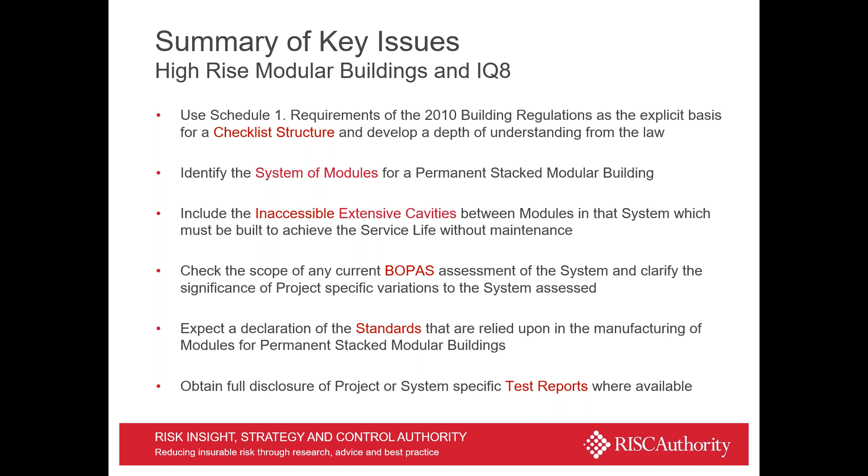So that's the summary. Hopefully I've drawn out the 3 issues that we wanted to concentrate on: the cavities between modular systems, the fact that this is a frontier of knowledge, and there are things people don't know. There are things people aren't being told. Whether or not BOPAS know everything that a manufacturer does is a question, but there are things that aren't known, and that was part of the reason why the BRE developed and has struggled to develop the LPS 1501 test.

But most of all, I think, try to keep it practical. Try to keep the issues focused on the practical solutions that lead to compliance with the legal requirements. Don't just invent yet another checklist. See how they relate back to the law. So yeah, thank you.

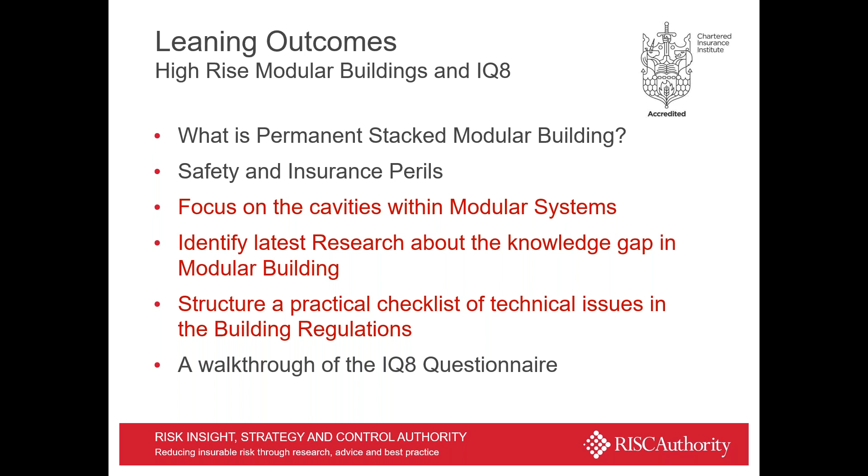The IQ questionnaire will take the form of a front end with the higher level questions, and then an appendix that will drill down through the A to P list into increasingly detailed information. At some point you've got enough information because you've got answers back. The high level questions are there to draw out some of the bigger themes so you can understand the risks involved in the wide range of increasingly proprietary systems being offered for modular towers, permanent modular buildings, and stacked modular buildings.

So thank you. If there's any questions, I'll do my best to have a go at answering them, and hopefully I haven't overrun too much.